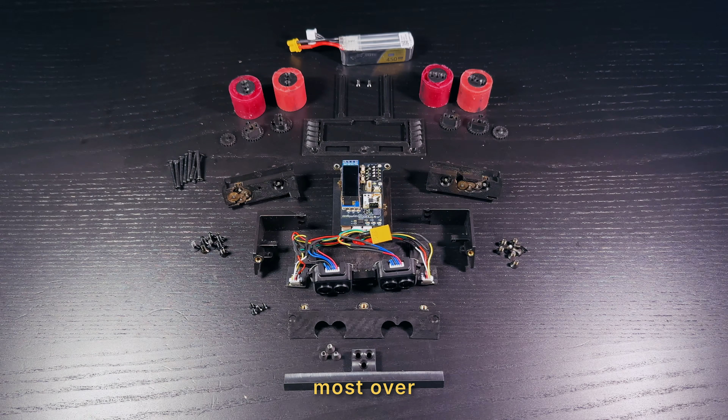This is a Sumo robot. It fits in my back pocket and it actually fights. It's also the most over-engineered thing I've ever built. A custom 4-layer PCB, a CNC machined steel base, and a 5-stage gearbox, squeezed like it's not even there. Every single part designed from scratch. This is the story of Lil Szymi.

And honestly, most championship mini Sumos look horrible. Wires sticking out everywhere like spaghetti. Ugly, green, store-bought PCBs slapped together. No passion or any thought process visible. Just a box filled with electronics with hopes of getting lucky and winning at least one fight. And that's just not how I do it.

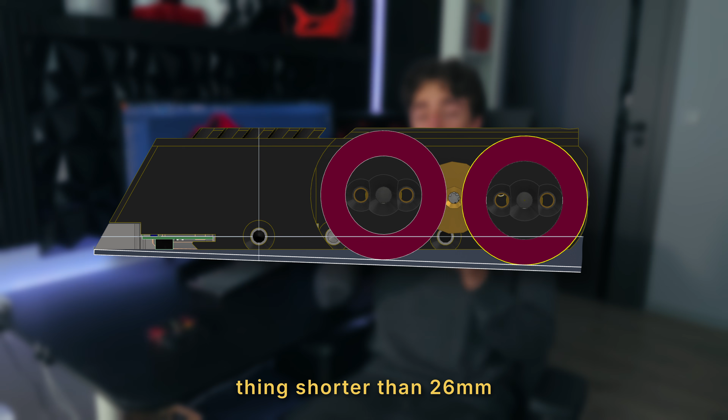I went for 2 motors driving 4 wheels. I built the whole thing shorter than 26 millimeters, which was the shortest mini Sumo I've ever seen. And I made it actually look beautiful. Sleek angled front, minimal exposed cables, a custom 4-layer PCB on top, running a functional OLED interface. The whole thing engineered like an expensive product, not a science fair project.

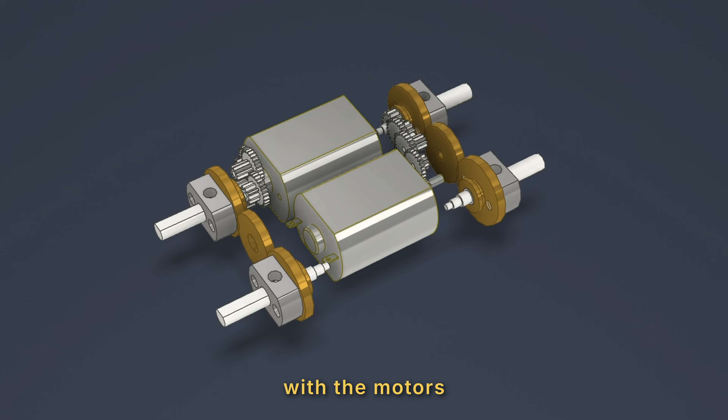Every Sumo robot starts with the motors, because they're heavy. They sit at the center of mass and then decide how the rest of the robot is built around them. I bought motors that already came with their own gearboxes. I then removed the gearboxes entirely, kept the motors, kept the gears, and I designed my own gearbox from scratch.

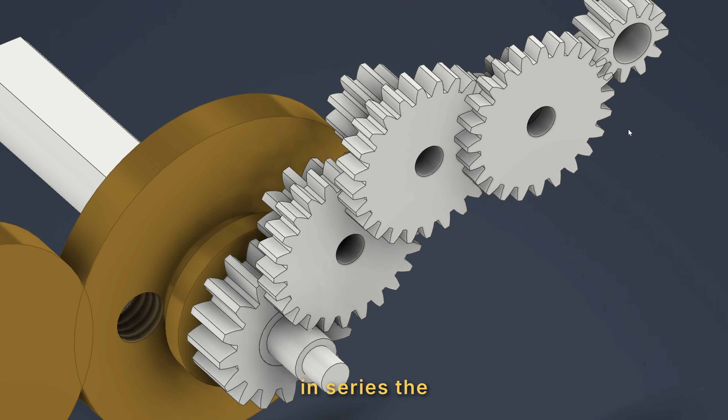5 gears in series. The first gear sits on the motor shaft. The last one sits on the wheel shaft. And there are 3 double spur gears connecting them, achieving a final gear ratio of 800 to 33, which is around 24:1. That's almost no top speed, but a crazy amount of torque.

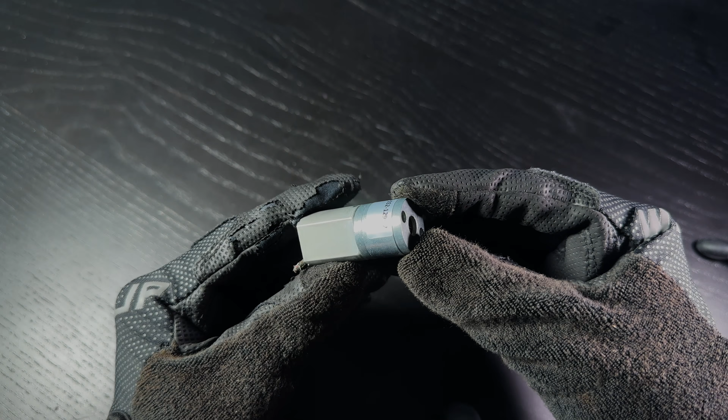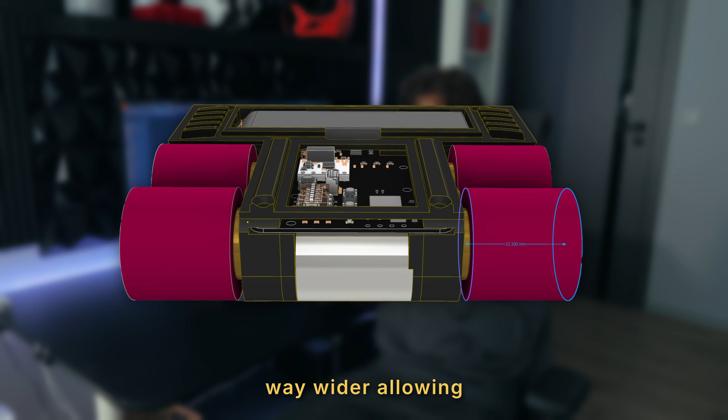The original gearboxes that the motors came with were 19 millimeters wide, and that's just too much. I managed to get mine down to 10 millimeters wide, and that really matters. It allows me to make the wheels way wider, allowing for more grip and more traction, which is very necessary when fighting.

This creation is a complete nightmare to physically assemble. Each gear sits on a steel shaft just 1.5 millimeters in diameter. I bought those shafts 100 millimeters long and cut them all down to size for the gearboxes. Glued them in place and hoped they would hold. There was no margin for error, but once it was together, it worked excellently.

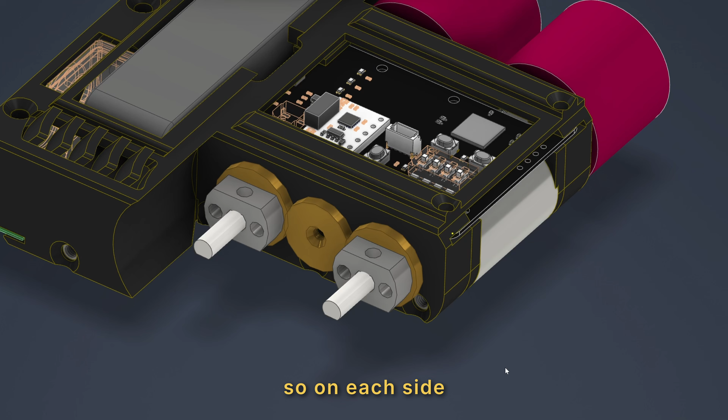Now, the problem with 2 motors and 4 wheels is connecting them. Each motor only drives 1 wheel, so on each side, I added a second, smaller gearbox. Just 3 gears. 1 on the front wheel, 1 on the back wheel, and 1 in the middle, linking them. Same torque on both wheels. No belt, no chain, just 3 meshed gears. So essentially, we got 4 gearboxes in total on this robot.

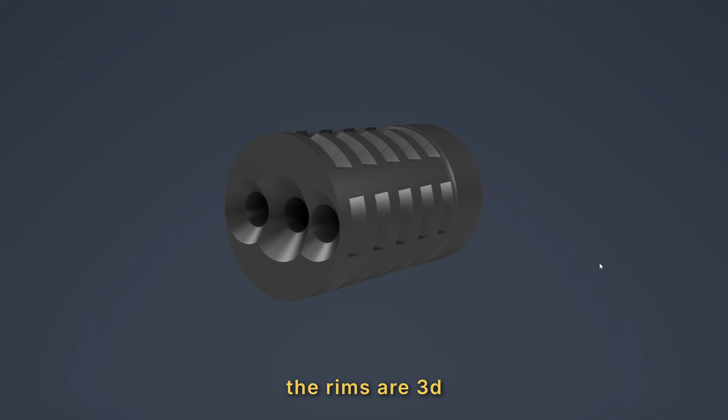The wheels on this thing are 25 millimeters in diameter, and that essentially sets the height of the whole build, because there really is no point in going lower than the wheels. The rims are 3D printed out of PLA, as well as the hubs and essentially the whole outer gearbox.

The tires are made of silicone, but I obviously didn't buy them because there are none to buy. I made them. I designed and 3D printed silicone molds. I cast these tires myself. I added grooves into the rim model so that the silicone has something to bite into and lock on. About 4 millimeters of the tire all around the wheel. The thicker the silicone, the more surface area touches the ring, which gives you more grip.

Now moving on to the chassis. The metal base is probably the most important part of the whole robot. It holds together practically everything. The line sensors, the LiDAR sensors, the metal plow, the side panels, the gearboxes, the wheels, and the motors, practically everything. And essentially, I had 2 reasons to make it out of CNC machined steel.

Well, first of all, because it connects practically everything in this robot, steel is a material I can trust. Because plastic can deform, the printers are imperfect, and you might have some slight misalignment. And the second, more important reason is that it essentially occupies the whole lower surface area of the robot. Making it out of steel moves the center of mass way to the bottom. It gives you more grip and much better stability.

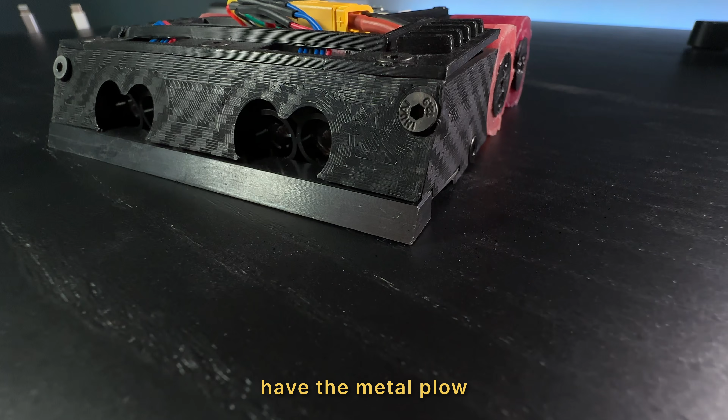At the front, we have the metal plow, and I also decided to go for CNC machined steel for this one. The plow is the 5th point of contact with the ring, 4 wheels plus this. The whole robot is balanced to push down on the plow so it can slide under the opponent and lift them off, making it much easier to actually push them off the ring.

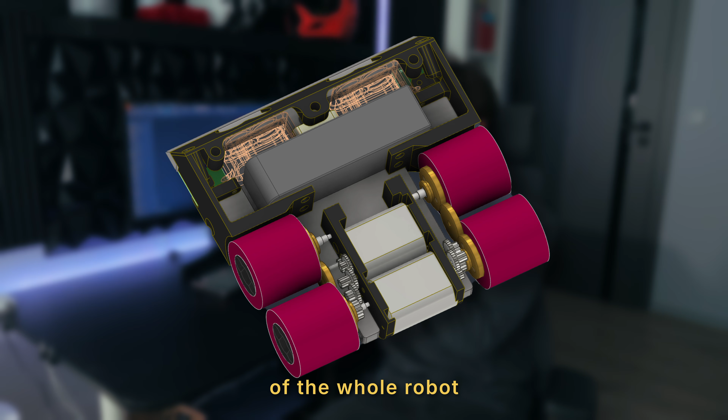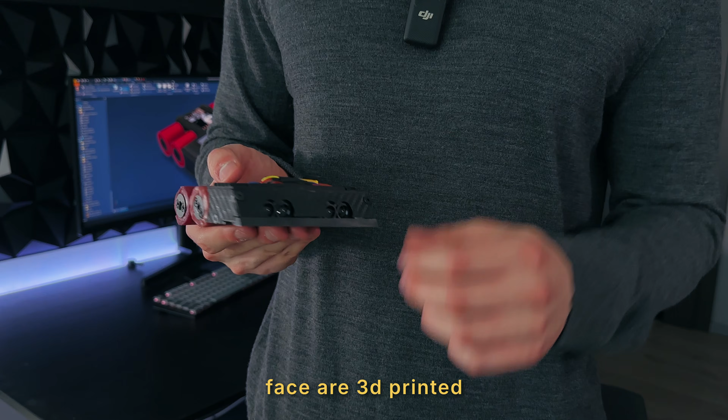The chassis is pretty much shaped like the letter T, with the whole drivetrain taking up pretty much 60% of the whole robot. The front is mainly the LiPo battery, the 2 LiDAR sensors, and line sensors on the sides. The side panels and the front face are 3D printed in PLA. Both side panels are angled to give the robot a sleek profile, and they have some decorative fins on them, which serve no function at all, but they just look cool.

Now, to make the whole robot so short, I actually had to make cutouts for the LiDAR sensors as well as the battery, which is kind of crazy, but it's really the best way to deal with it.

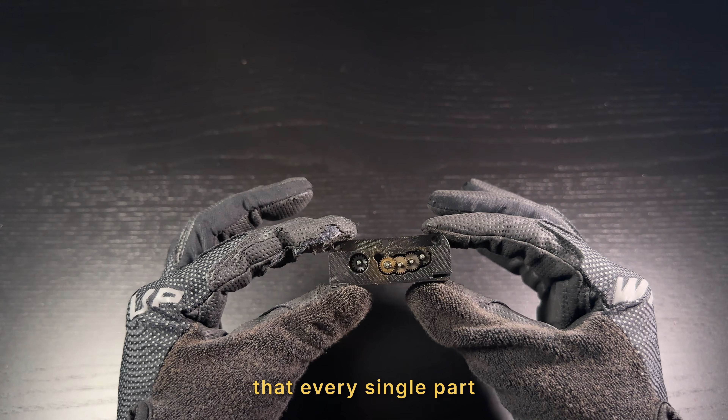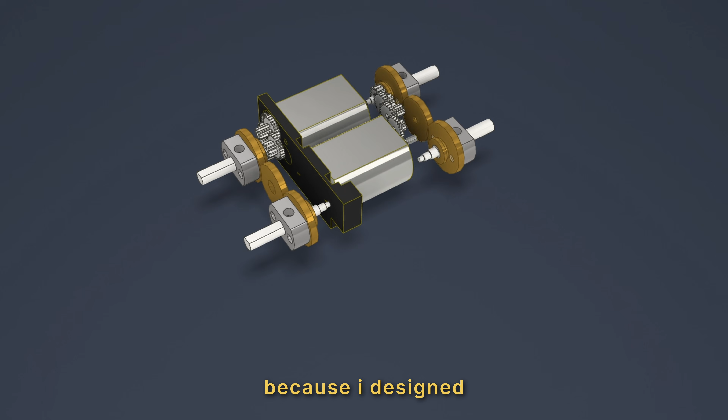And one very important but subtle detail about this robot is that every single part, including the quite complicated side panels, the roof, the front panel, and especially the gearboxes, are all easily 3D printable without any supports at all. And I was able to achieve this because I designed the whole thing from scratch, and I knew what will be 3D printed and what will be, let's say, CNC machined. And it sounds like a small thing, but it really isn't.

When you're designing things, especially parts as small as these, it is really important that while actually designing it, you keep in mind how will you manufacture it. With FDM, you might just have to add a couple supports. But if you're planning to CNC machine something, it might turn out that it's not even possible to make it.

All of the electronics live on a single custom 4-layer PCB sitting right above the motors. The very tightly constrained size and space really left no other option but to go for at least 4 layers. The component density is quite high, and I wanted the layout to look intentional, not just routed for whatever is convenient. The top of the board is entirely dedicated to interface. You've got buttons, switches, the OLED, the start module, pretty much everything you need to actually operate the robot.

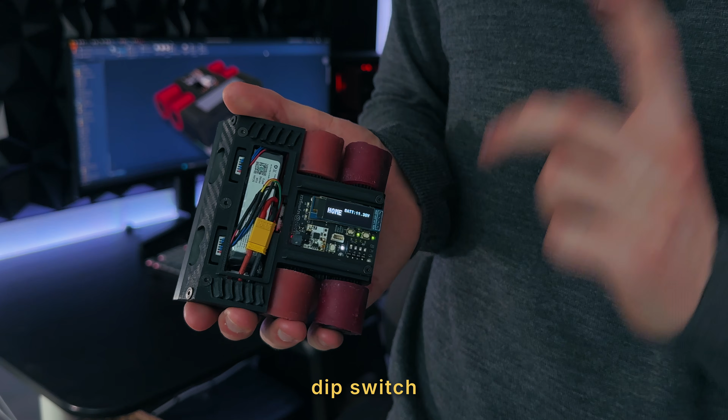At the top edge, we've got my Instagram logo, because why not? 3 blue LEDs that the firmware drives for status output, the IR receiver to start the robot remotely. We've got a reset button and 2 spare buttons just to operate the interface, as well as a 4-position dip switch. This one actually turns the robot on and off, obviously. Got the programmer to actually connect with the robot and program it. And very importantly, we've got the OLED right here.

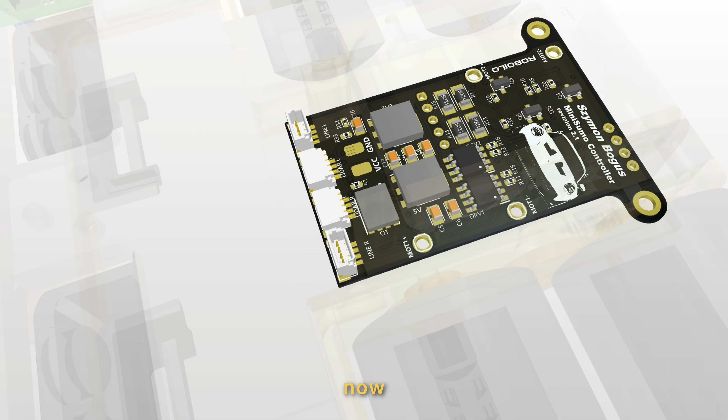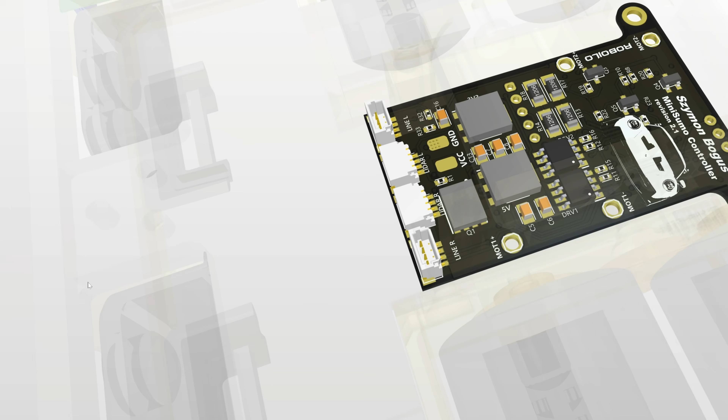And that's about it. Now, the bottom of the board is the power and motor side. 2 motor drivers, the main MOSFET that gates DC input from the battery, 2 linear regulators, stepping battery voltage down to 5 volts, and then 3.3 volts. The 4-pin sensor connectors all sit along the front edge of the board. And on the bottom, you'll find a small Porsche 911 GT3 RS, because at the time of designing this board, that was my dream car.

But there is one more detail on this board that I'm particularly proud of, and it is the motor connectors. Most PCBs usually connect them using a 2-pin power or an XT30. That's just a classic. However, there really is no place for an XT30 right there, like not even for the power supply. So I had to use a different, way smarter approach.

The motors sit right beneath the PCB. So what I did is I put pads right above the motors, so I just run the cables from top to the bottom. That's a perfect connection, using absolutely no space. This, coupled with the squeezed gearboxes, allows this robot to have some fat ass wheels. And this is what actually makes it impressive, and I like it.

Now, hardware is only a part of this whole robot. The other part is the firmware, running on an STM32F411. A Sumo robot essentially has to do 3 things: find the opponent, fight the opponent, and not fall off the ring. And all of them simultaneously. When it comes to finding the opponent, the simplest way I can put it is, if the left sensor sees, you go left. If the right sensor sees, you go right. And you do that until both see, and in that case, you just go straight through.

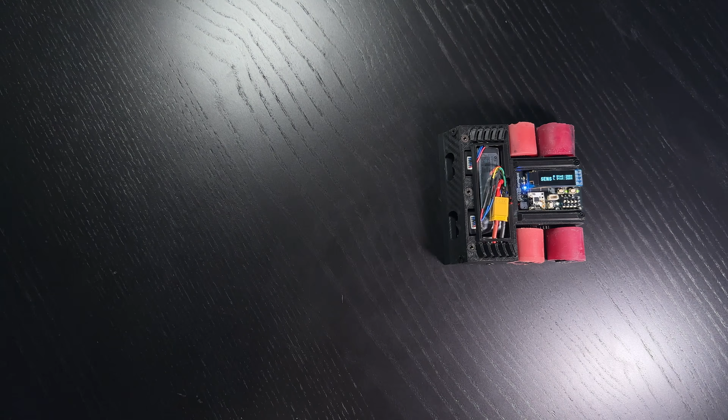Now, to make it clear, the firmware running on this guy and hopefully other competition robots is slightly more complicated, but don't worry about it. And you can actually see the tracking happen in real time on the LEDs I implemented on top of the board. As you may or may not know, on most championships, the ring is black and has a white outline. If you want to win, you cannot drive off of the ring, right? You have to push off the enemy.

And the white line is actually crucial information for your robot because it marks the border. You should probably implement some infrared sensors that can tell between black and white to actually tell the robot when it's going out of bounds and just back off. My OLED on top has 3 modes: home, sensors, and accelerometer. And 1 button cycles between them. And all of that runs in parallel on a single STM32 MCU. 5 timer interrupts, each handler doing its job at exactly the right frequency.

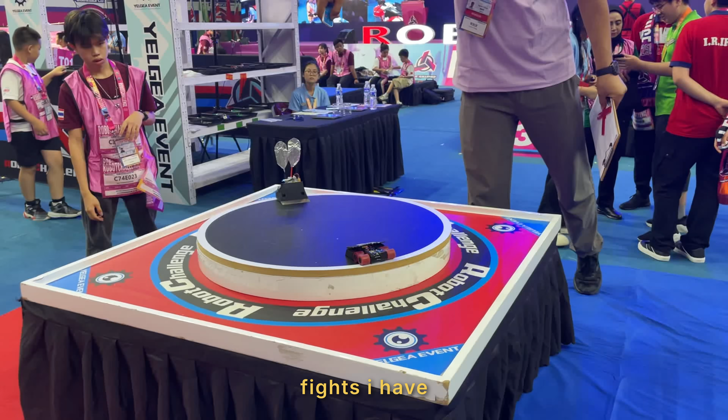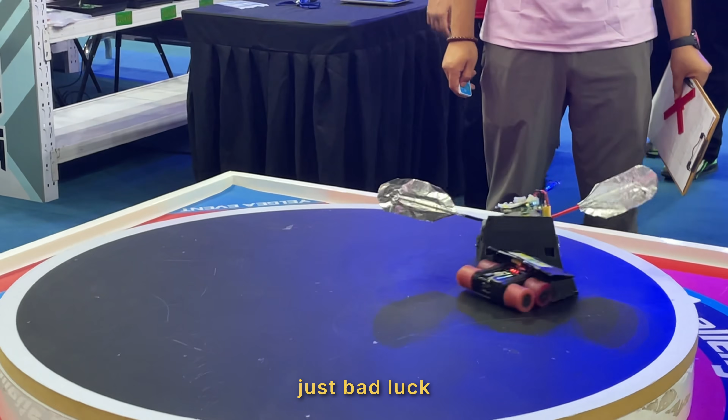Lil Szymi last year competed at the Robot Challenge World Championship in China, and I managed to record 5 fights. I have captured his 2 wins and 3 losses. This one was the worst one. I was actually winning most of it. The robot was pushing well, the LIDAR tracking was working, and then I just drove off the ring. No contact, just bad luck. You know, it happens. I also had another loss where the robot just refused to start. Quite unlucky, but you know, it happens.